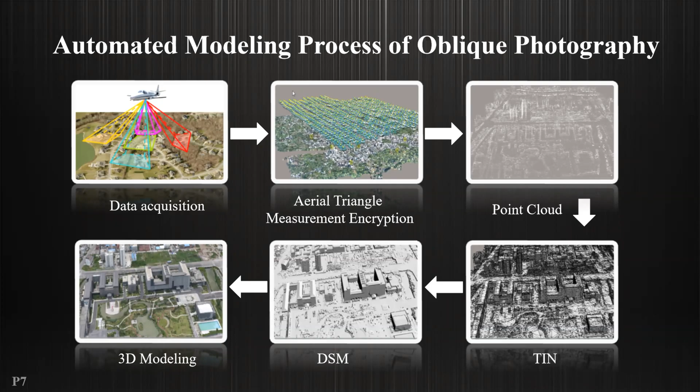This is one of the examples we did in a city in China, and we can see for this area the model is very detailed and looks very real.

There are some advantages of oblique photography modeling—we can call them efficiency and low production cost. So the advantage of oblique photography is very obvious, and based on the oblique photography model, we can do further functions or operations based on the modeling we get.

We can overlay the oblique photography with vector polygons to extract buildings or objects from the continuous oblique photography model. Based on this, we can achieve functions such as drawing a polygon on a website, giving it attributes, and submitting it. After that, every time we click on that building, we can get the attributes, which are stored inside the vector data.

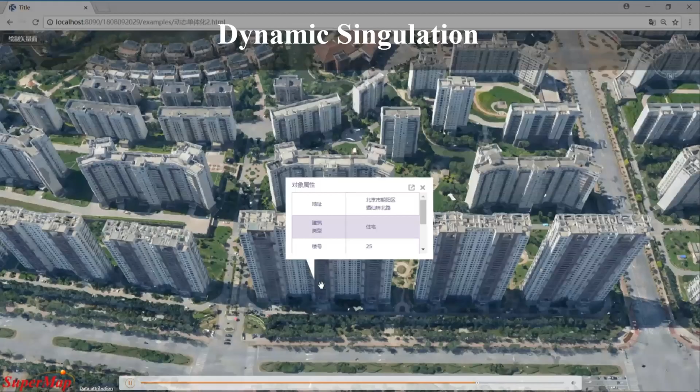Based on this, we can create thematic maps to render buildings in different colors for the whole city, and we can achieve more functions, such as management of 3D real estate for urban complex buildings.

For example, realizing sophisticated management of complex building complexes, and realizing comprehensive expression of multi-property rights buildings in the same space, or applying 3D results to confirming rights of registration in the registration and acceptance stage. The last one is the integrated 2D and 3D data being shared by departments to further explore value.

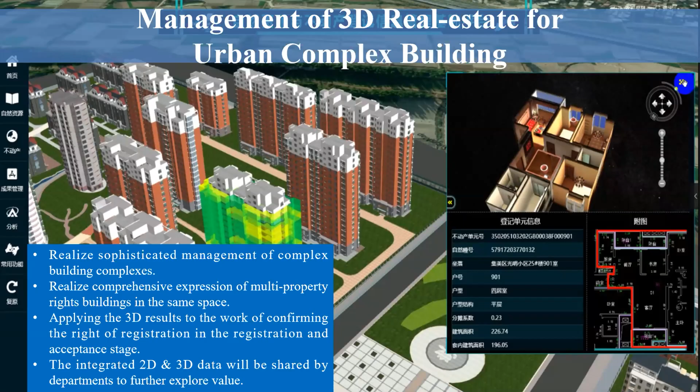So that's oblique photography. The second topic of my presentation is about BIM. So what is BIM modeling? It's defined by the American National BIM Standards Association as a digital expression of a construction project—a shared resource providing a reliable basis for all decisions during the entire life cycle of the facility, from construction to removal. At different stages of a project, different roles insert, extract, update, and modify information in BIM to support and reflect their respective responsibilities in the collaborative work.

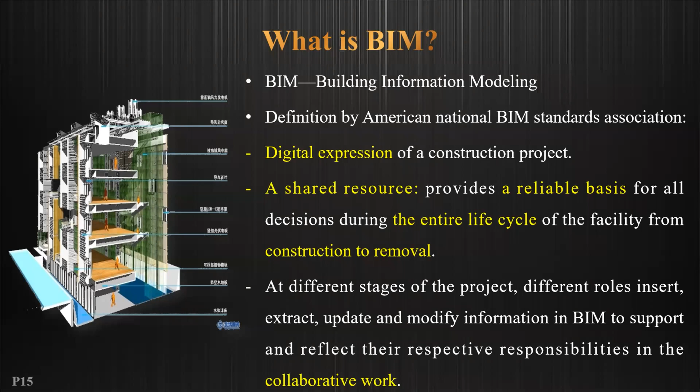So BIM will be very helpful and necessary in digital twin. This shows the global development of BIM. The first is in the US—the US GSA department is an advocate of BIM technology, and until now more and more countries' governments have raised the standard of BIM in their countries at different times.

So BIM plus GIS is very necessary in the next stage of using BIM. The BIM software or BIM model itself can be used in the design, planning, and construction stages of a building or construction, but in the operation and maintenance and management stage, GIS can help a lot. So BIM plus GIS can bring the building from macro to micro, and from outside to inside. Okay, so that's about BIM.

Based on these two types of data, oblique photography and BIM, what kind of function or application can we achieve in digital twin? Here I divide them into four stages for a building. The first one is input and visualization, the second is the urban planning stage, and then analysis and simulation.

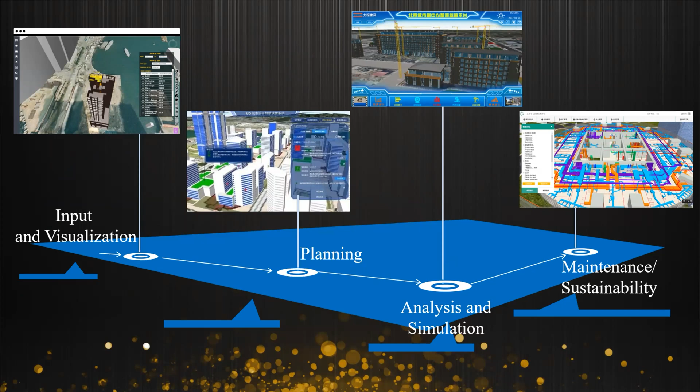The last one is maintenance and sustainability, input and visualization.

In oblique photography, SuperMap cannot generate the oblique photography module itself, but there are a lot of commonly used software we can use to get data from, such as Street Factory, ContextCapture, Pix4D, or PhotoScan. All of them are popular software for generating oblique photography.

In SuperMap, what we can do is put the oblique photography module into a GIS environment, and they can be shown together with other types of GIS data, including terrain data, satellite image data, underground body data, and other types of modules.

There is another example, for a whole city, which is a 3.2 terabyte oblique photography module for the whole city. We can see it shows the factory in a very detailed way.

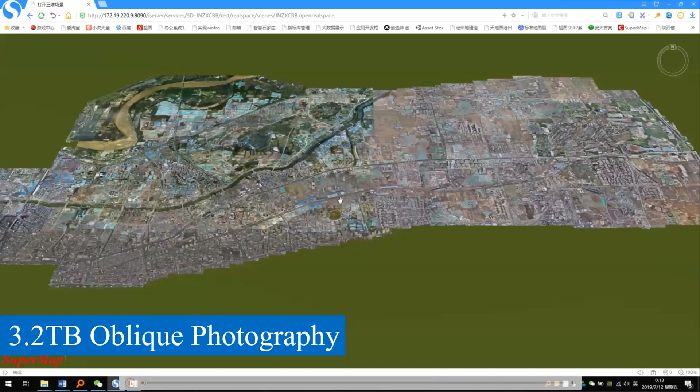For the whole data, it doesn't need to take a long time to capture all of them. Only a short time, maybe within one month, we can get all of the information like this very easily. We just need to get the permission to fly a UAV around this city.

So in the industrial chain of oblique photography, SuperMap, which represents the GIS platform, is in the middle. Earlier, we need to use UAV or an oblique camera to fly and do automated modeling. Then we can import all of that into the GIS platform, and after that, we can construct or establish different industry applications.

Talking about BIM, it's actually similar to oblique photography. SuperMap cannot generate the BIM model, but we can use it with different BIM software like Revit, Bentley, CATIA, and for different formats like CityGML, IFC, FLT, or GLTF, we can support all of them.

So we can see models from Revit, Bentley, and CATIA on the left side, in their respective BIM software. And on the right side, it shows totally the same model in the GIS software, which is SuperMap iDesktop.

So talking about input and visualization, next I want to talk about planning and design. There are some problems in planning and design, such as collaborative design, ground and underground planning, multiple planning conflicts, and scientific planning. In this stage, there are applications like online design, parametric design, 3D design, model browsing, internal roaming, and scheme comparison.

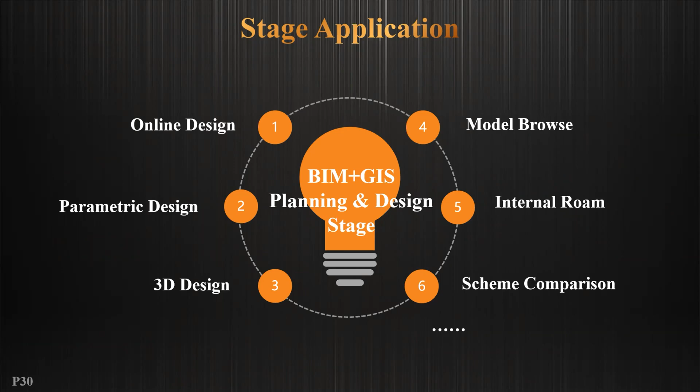So this is what we can do in a digital twin platform.

First, this is a real case we did in Hong Kong, and the whole city model is generated by oblique photography, but some of the important buildings, the key buildings, we use BIM models to render.

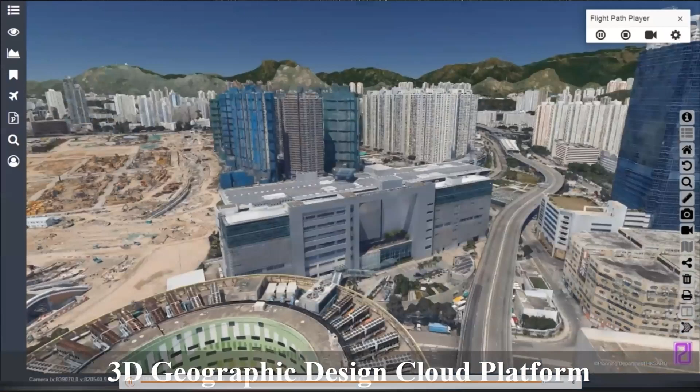And it can help us do urban planning functions, such as scheme comparison. We can put different models of the same building in the same view to compare the scheme.

We can also compare it with the street view, with the current street view, and set it with the photo to show the differences, like after we build a new building here, what will the differences be?

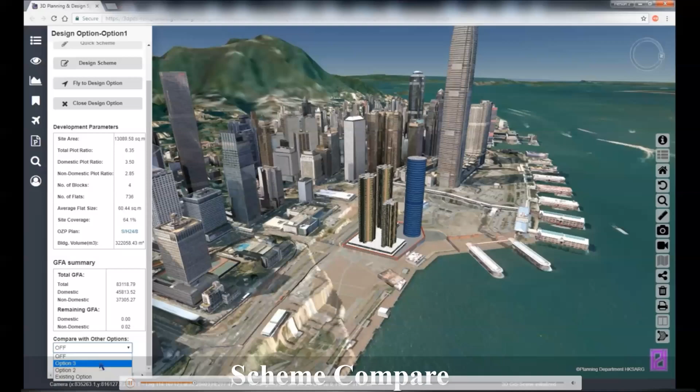The next function is about planning approval. Designers can submit their plan to the system, to the website, and then the user can see detailed information, the detailed parameters of this building, and then we can choose to pass it or not.

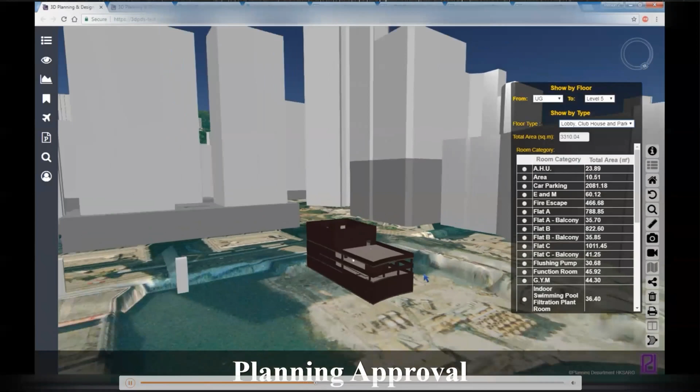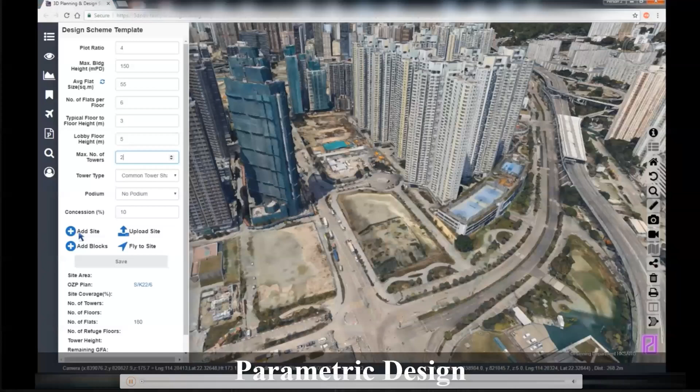The next one is parametric design. So if I just want to roughly add a building here, with a different floor count, with a static shape, how will it look?

So we can use parametric design to easily add new buildings and change the height and the position of them.

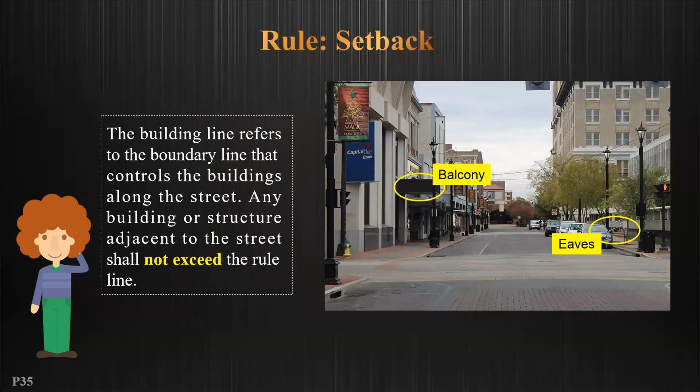In urban planning there are some rules, such as setback. Setback means the building line refers to the boundary line that controls buildings along the street, set back from the street. In the digital twin, we can easily get the model of buildings and, based on analysis, see which building is illegal.

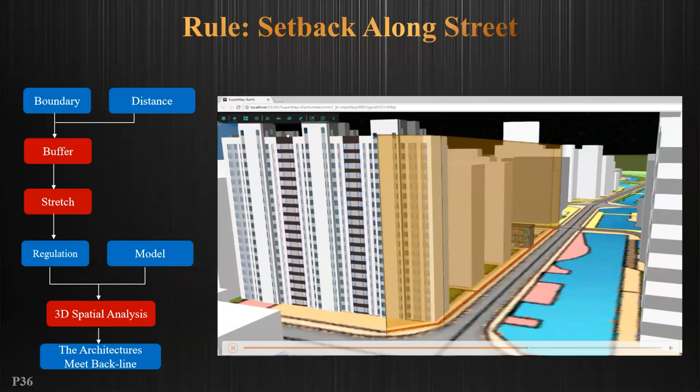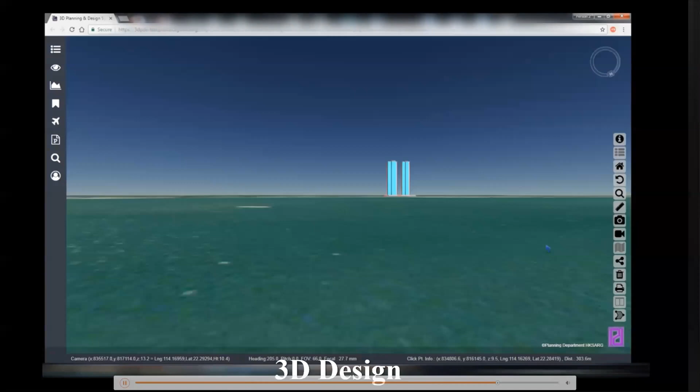In the 3D design function, there are a lot of 3D analysis, such as openness analysis, which shows whether the sky view will be affected by a new building or not, and also shadow analysis, where we can simulate shadows in the city, and flood analysis, which shows which parts will be flooded. Based on the terrain, we can do slope and aspect analysis. So there are a lot of 3D design functions that can be achieved in digital twin applications, like this one analyzing the skyline.

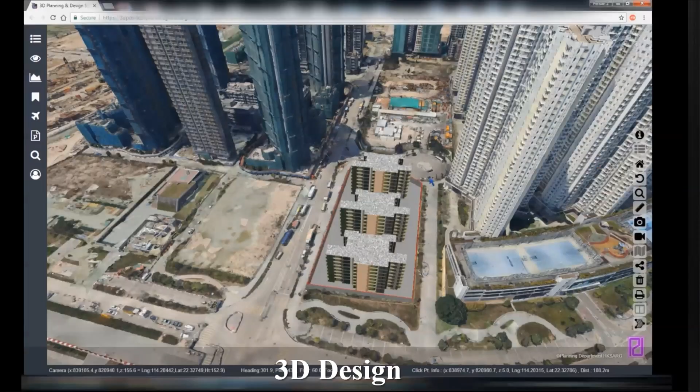There are some more cases, such as planning modeling, decision support, decision monitoring, and others. Now we go to the next stage of application management, which is analysis and simulation.

There are some 3D analysis functions based on the model, such as cross clipping. We can draw a box to clip the building and see the inside of it. It also supports BIM spatial query and attribute query.

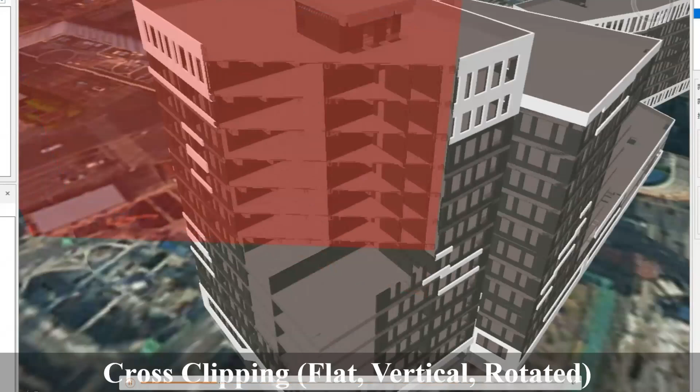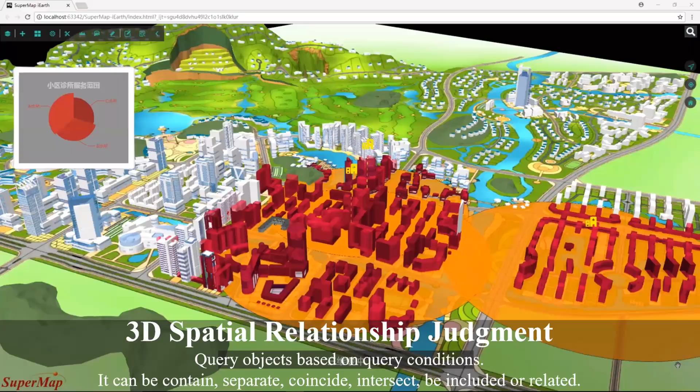There is also a function for 3D spatial relationship judgment. We can query objects based on query conditions, which can be contain, separate, coincide, intersect, be included, or related. Other spatial analyses like viewshed analysis, shadow analysis, extract skyline, section map, terrain contour map, and terrain slope aspect map are also allowed.

All of the results of analysis can be exported as a 3D solid model.

In the last one, maintenance and operation can solve some problems like incomplete supervision, weak early warning, emergency scheme issues, or poor management and facilities. So we can achieve functions like video supervision, emergency management, asset management, equipment management, safety management, and indoor navigation, such as for a skyscraper.

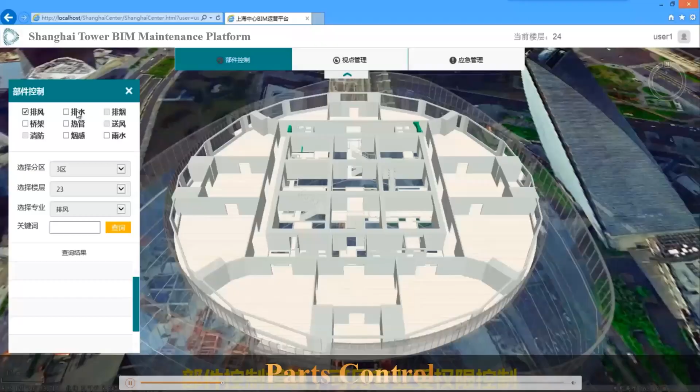This is the Shanghai Tower maintenance platform. The Shanghai Tower is the second highest building in the world, the highest one in Asia. We established all the detailed objects inside of it, and all the detailed information and parameters can easily be checked from this system.

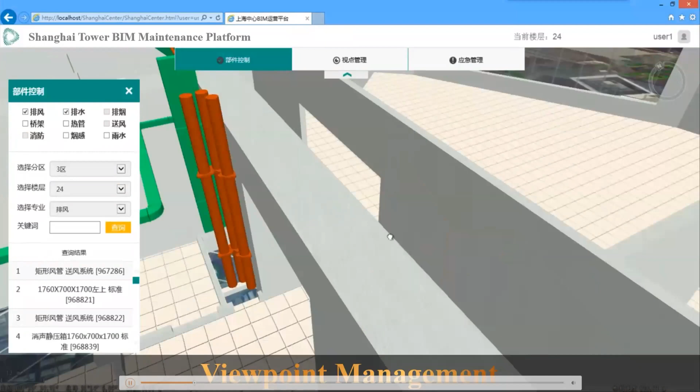We can achieve parts query and positioning to get the location of every object. There's also viewpoint management, so if we add some new viewpoints, in the future when we move around, we can easily go to the viewpoint we stored earlier.

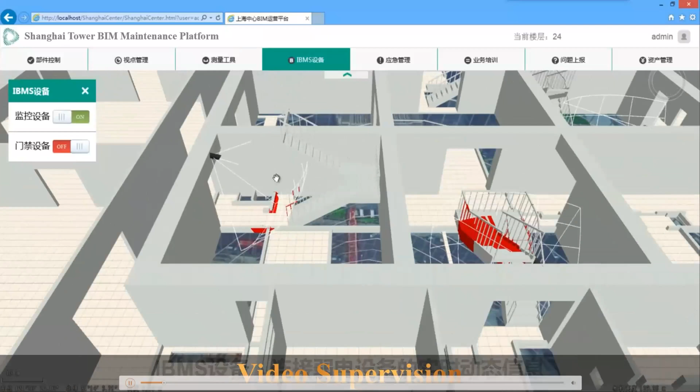There is also video supervision, which can connect with IoT, such as a CCTV camera.

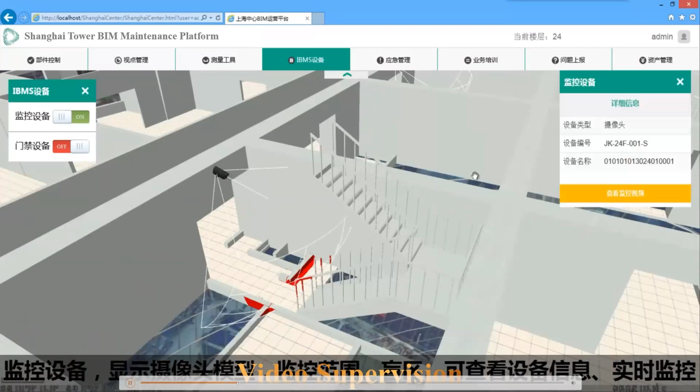Hello? Yeah, sorry, it seems my network has some problem. Let's continue.

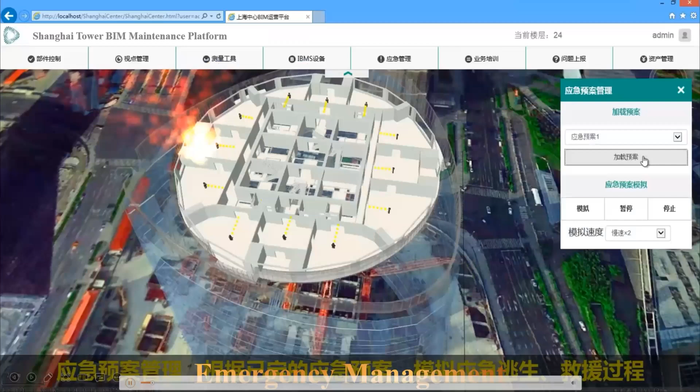About the features here, next is emergency management, where we simulate the emergency situation and have an emergency plan to manage emergencies. And the asset management aspect, where we can see all the detailed information of each asset.

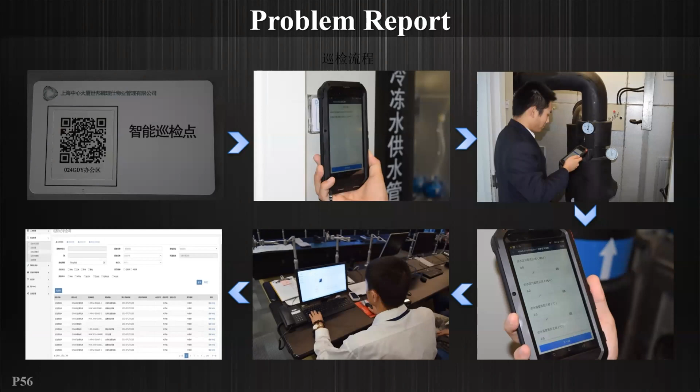For problem reporting, we can connect with mobile devices, and based on the mobile we can report problems when we do the operation and maintenance function.

This is a smart city management function, and it provides functions like video surveillance, labor supervision, environment monitoring, progress supervision, video conference equipment monitoring, and others. The data size is 252 gigabytes, and the number of 3D models reaches 3 million.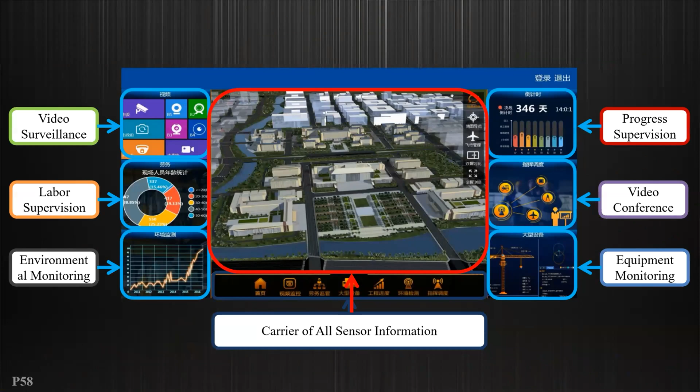There are some other functions or cases we did before, like equipment check, facility maintenance, park energy consumption analysis and optimization, and the last one is security facility integration.

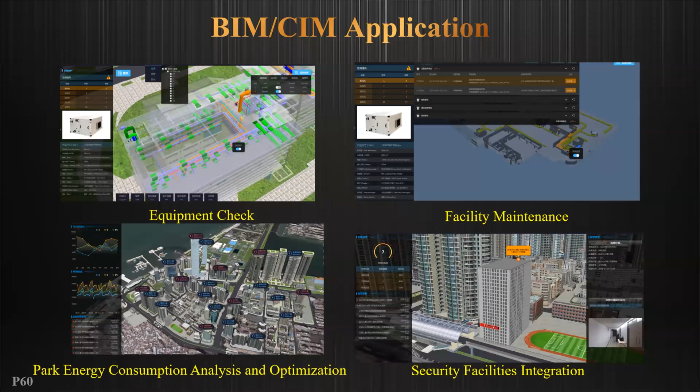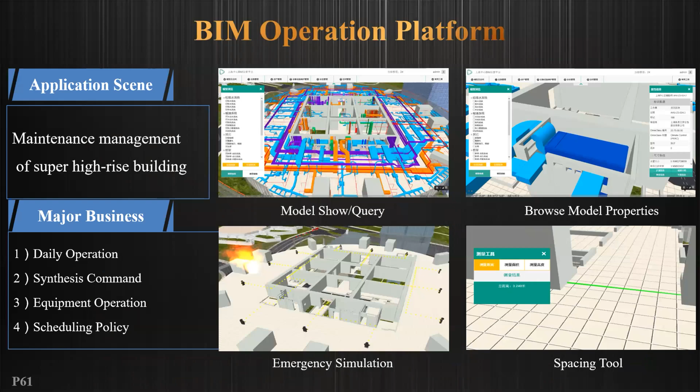All of them can be easily used in digital twin technology. In the BIM operation platform, we can achieve daily operation, synthesis command, equipment operation, and scheduling policy, and show the whole city view in a digital way on a big screen. Other applications include building overview, key area display, building management, weak power management, fire warning, and video management.

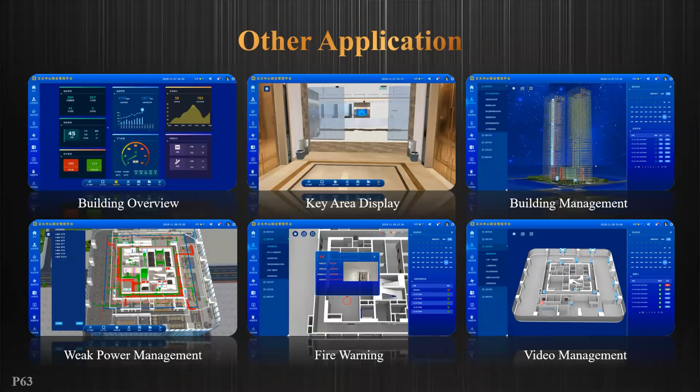Okay, thank you all, this is my presentation.

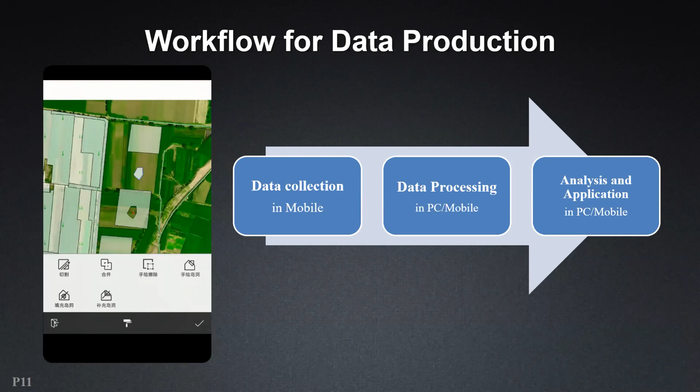There are also some advantages of field surveying with this app—it can save your memory and power, and also save mobile data. It is high efficiency, and it supports searchability and dynamic interaction.

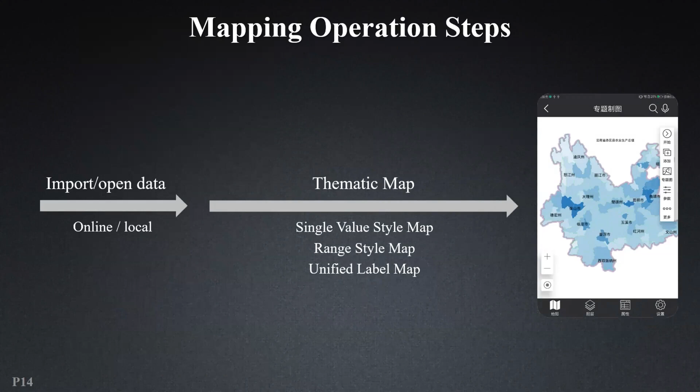So the next function is mapping. It is easy for you to do a mapping in the mobile terminal. You just need to import the data or connect the data first, and then do the thematic map, so that you can get a thematic map, just like the range style map or unified label map. Here lists some styles of the thematic map which can be achieved by the mobile terminal.

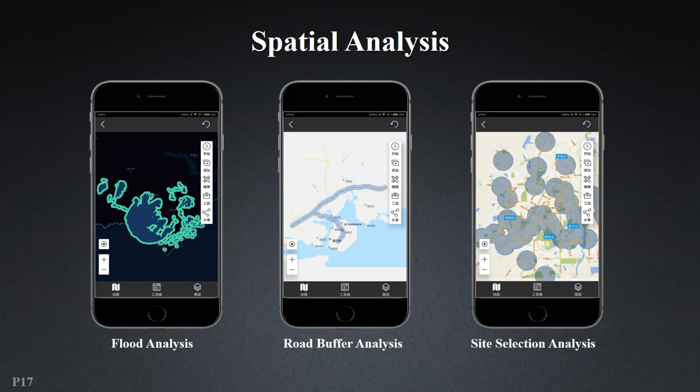And also the data analysis. The spatial analysis is the most important feature in the GIS field. So in the mobile terminal, the spatial analysis can also be achieved. You can easily and conveniently do the spatial analysis after connecting the data, such as buffer analysis and also site selection analysis with the mobile.

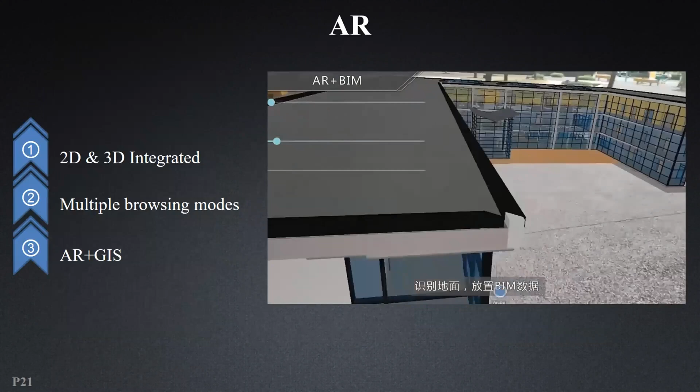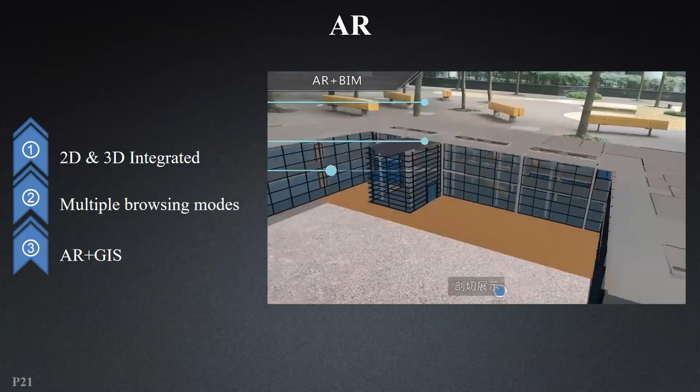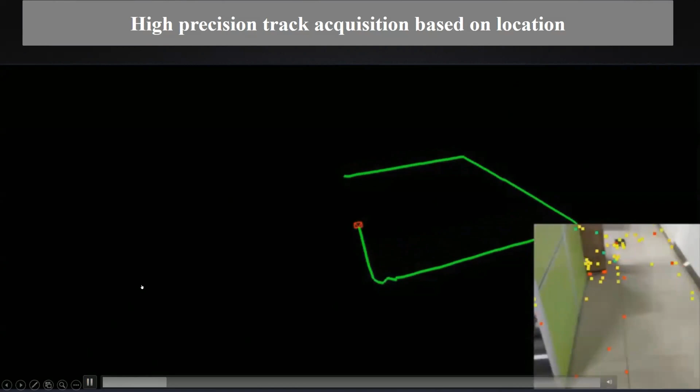And also the AR map is supported. So what is the AR map? It is integrated with AR technology, and with this capability you can view the 3D models with AR effect, just like walking in AR buildings. The AR technology also allows us to check and get a high precision based on the location indoors.

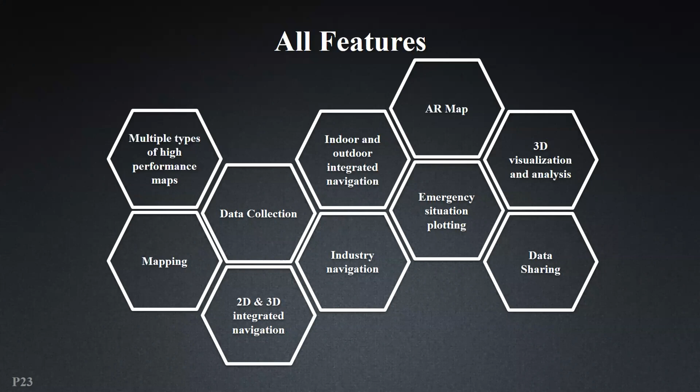So here are all the features of the template, just like the mapping and data collection, 2D and 3D integrated viewing, and navigation or indoor and outdoor integrated navigation. You can achieve all this with SuperMap iTablet, and it also has high performance map operations.

And the tablet can be used in many fields. Some cases use the template, just like the National Census Project, POI survey project, and land survey project. With SuperMap iTablet, you can get high efficiency in this field management.

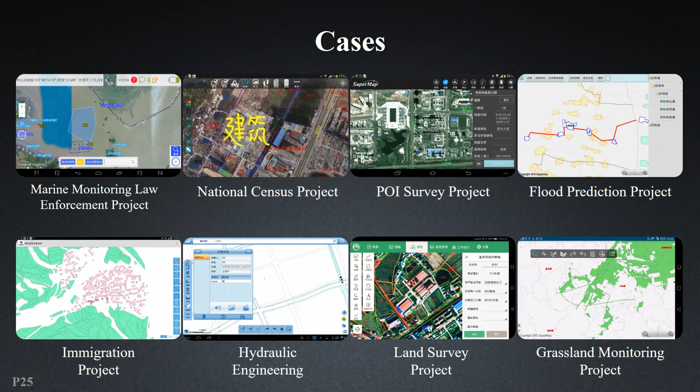And I mentioned that with SuperMap iTablet, you can share your data with your colleagues, or you can share the data from your mobile terminal to the desktop terminal, and the data can be displayed in multiple terminals.

And the second step of the discussion—here I want to talk about this. We will summarize this content.

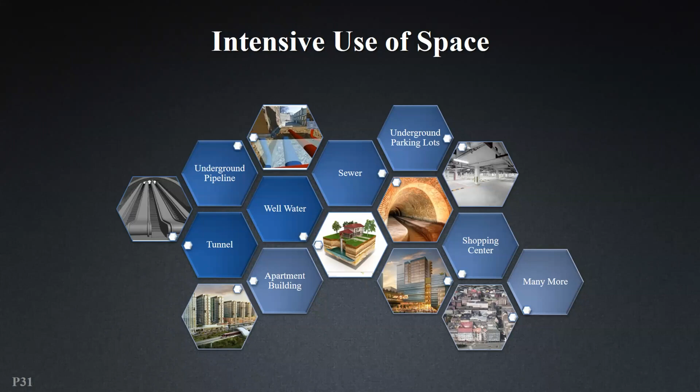So what technologies do we need to consider to achieve this 3D cadastre platform? Firstly, we need to update the 2D and 3D models for buildings. Traditionally we only have 2D data, so the first thing is to convert or update this 2D data to 3D models, and then we also need to connect the attributes with 2D and 3D data, so that in either 2D query or 3D query we can achieve information query of each resident or each building.

And also we need to build a unified standard for the cadastral data. The legality checking is also one of the points we need to consider, whether the buildings or the design meets the requirements. And also the platform can publish public information.

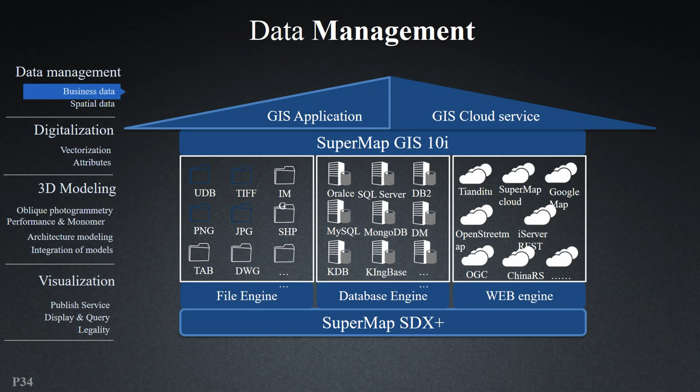SuperMap has strong capabilities of managing data. No matter the file data, or the data in the database, or the web engine data, we can all manage it with SuperMap SDX+, so we can integrate the business data together. As shown here, with SuperMap Desktop SDX, we can integrate the history data or the daily updated data together to construct a unified cadastral database.

For the spatial data, there is vector data, image data, and models. These different data can all be managed by SuperMap SDX, either in files or in databases. So you don't need to worry about how to manage the different kinds of data.

The second one is about digitization. As I mentioned, the first way is to collect the data on site, the second way is to digitize the image data, and also we can get the vector data by converting the CAD data.

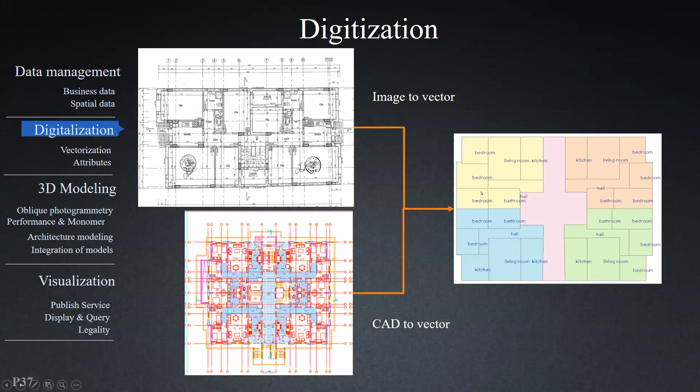Here we have the cadastral vectorization plugin in SuperMap Desktop. This plugin makes the digitalization easier, and you can get the result much more easily and conveniently.

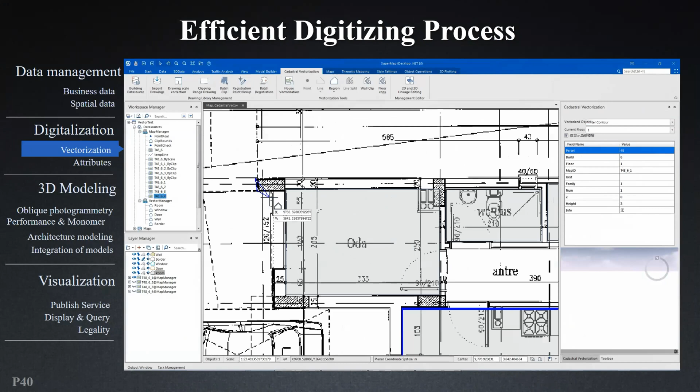You can click here and take a look at the video. You can import the image data to the desktop, and then draw the rooms. After drawing all the rooms, we can draw the outer contour, and this way get the wall of the building.

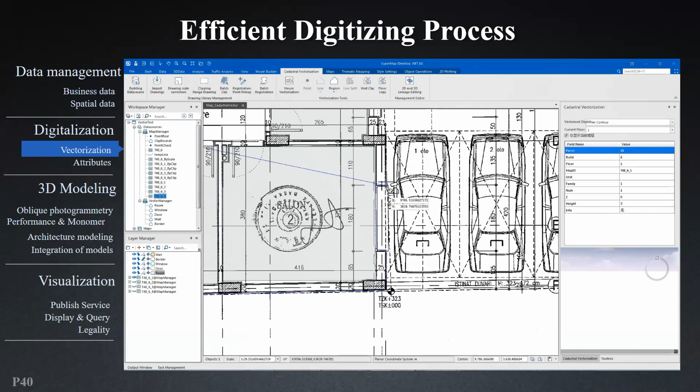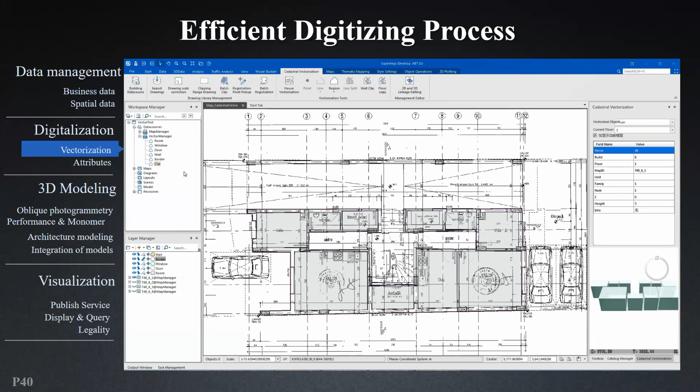We have many tools to help you do this operation. After that, we can use the wall clip to get the wall of the house. We can also draw the windows and the doors, and after the operation, we can get the walls of the building easily.

Then we can copy the walls to different floors, and then view the results with 2D and 3D integrated display.

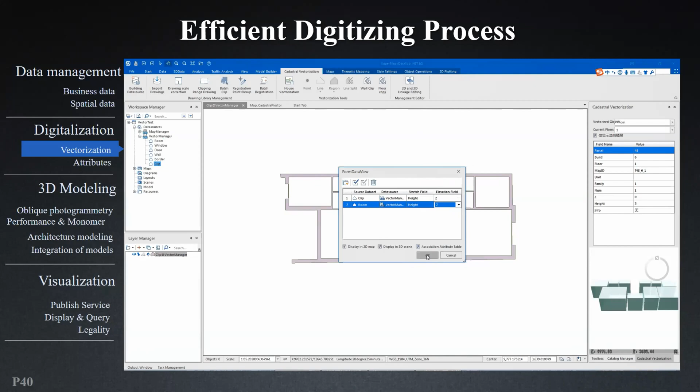After the operation, we can get the cadastral result, and we can view it in the 2D map and the 3D scenes.

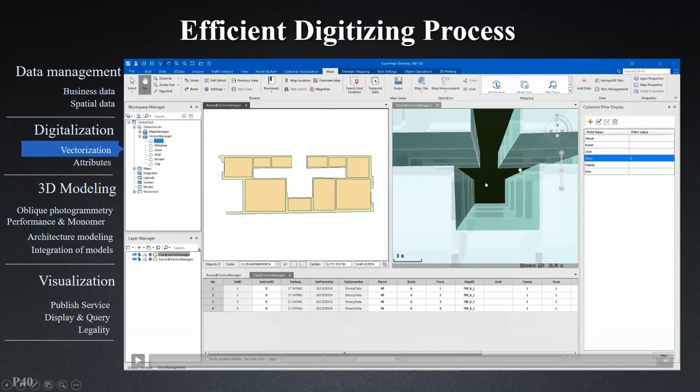For the CAD data, we can just import the CAD data into SuperMap Desktop, and then convert the CAD data to vector data. What we need to do next is adjust the data to the correct position, and after that, we can get the cadastre result.

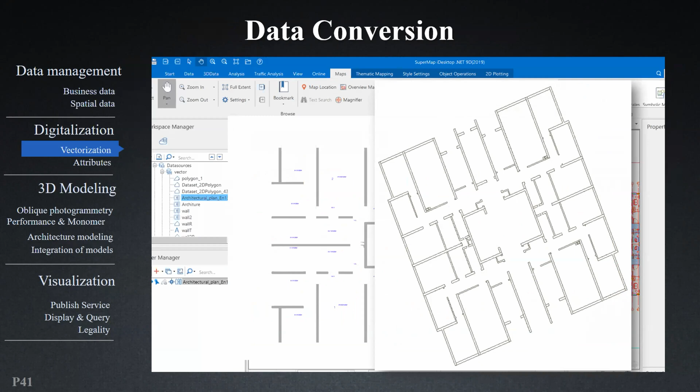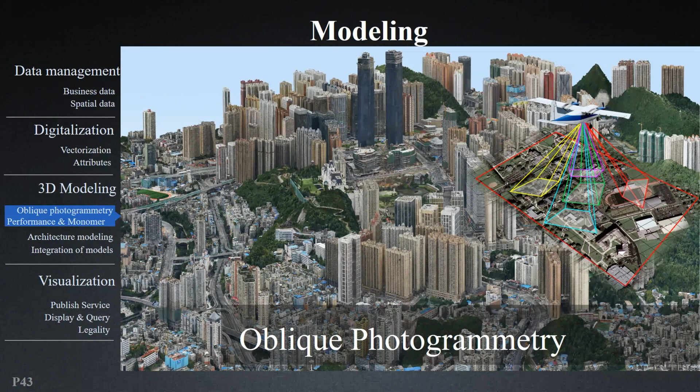So the next one is about 3D modeling. As the second digitalization method, we know that we can first get the 2D data by digitalization and then build the 3D models, and also use oblique photography to get this 3D model. There are many advantages of using oblique photography, and we can also have many methods to optimize its performance, such as texture compression, data type generation, and storing oblique photography through MongoDB.

All this can make you view these things in SuperMap efficiently. In addition, we also provide tools to process the oblique photography data, so you can make it much more perfect.

And then we can also get the building bottom surface with deep learning, so after that we can get the 3D models quickly. The second way is what I just mentioned, stretching from the 2D data to the 3D, and then we can get the 3D models quickly.

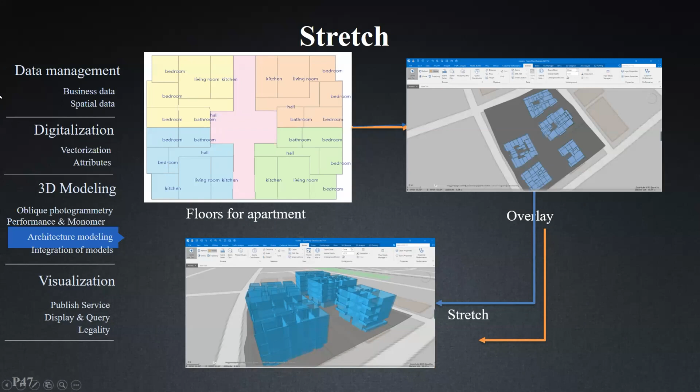And you see, we can display the cadastral data and view them associated, so we can check each floor and also each room.

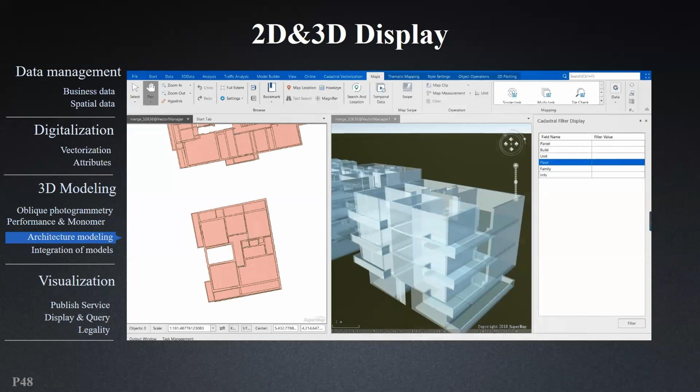Then we can also integrate the models and the oblique photography, so we can check the information on the oblique photography.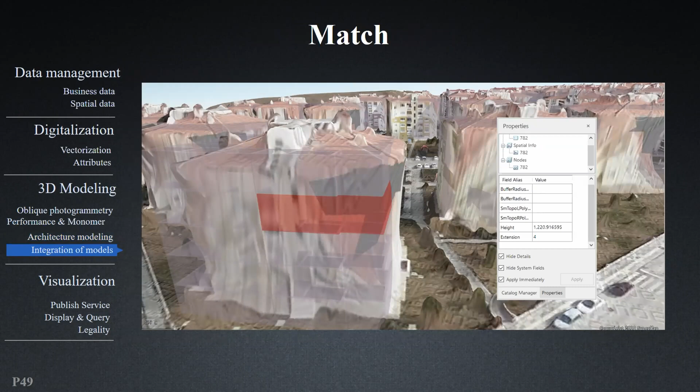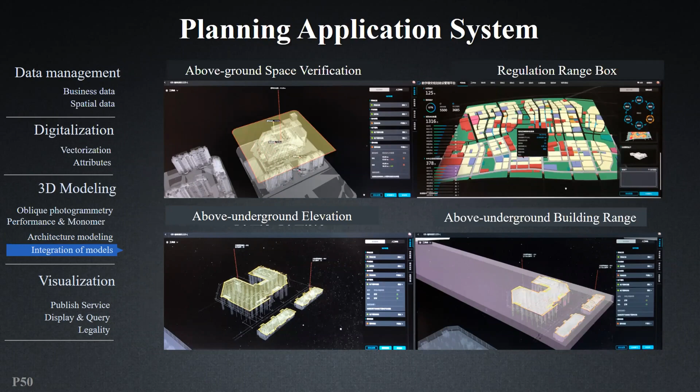These 3D models can also integrate with terrain data, merge with oblique photography data, and integrate with water effects and video maps with the oblique photography. All this data can be integrated into one platform.

So here we have a question: why do we import models into a GIS platform? The answer is because without it, the models lack geographic information, cannot integrate with terrain, have no performance with massive data management, and cannot do spatial analysis.

So after you import the models into SuperMap desktop and manage the different models there, you can solve these problems. Besides, in SuperMap we can also make yours much more beautiful by adding 3D symbols.

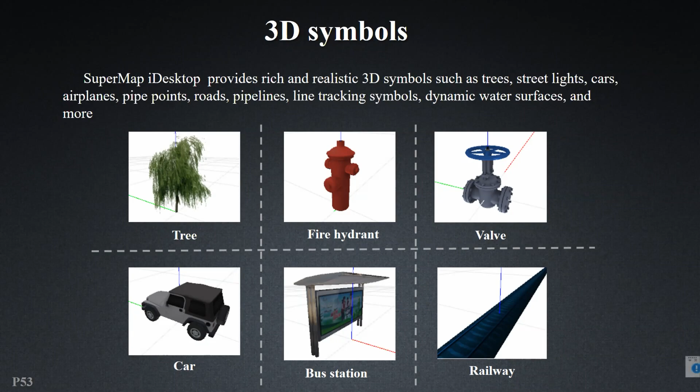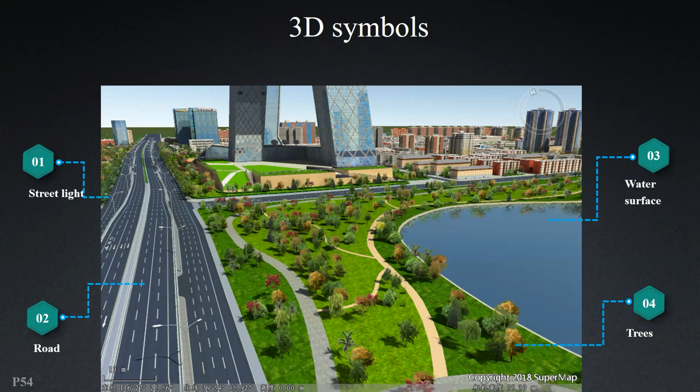You can add the street light, road, water surface, or trees. All these 3D symbols can be added in SuperMap desktop, and the dynamic water surface symbol makes the scene vivid.

So how do we solve the unified management of multiple source data? As we know, we can integrate oblique photography data and modeling data or BIM data, and all these different formats of data can be managed in SuperMap with a unified format. It is S3M. With S3M, all the data can be managed with a unified format, and it also makes the management easier.

The advantages of S3M are that it supports multiple sources of data, like BIM data, oblique photography data, and modeling data, which can all be generated in S3M format so you can manage them in a unified way.

S3M can keep the data secure, and it is a small file for web transfer, making it easier to manage. It can also render these 3D scenes, and after that, we can publish these 3D scenes through SuperMap server.

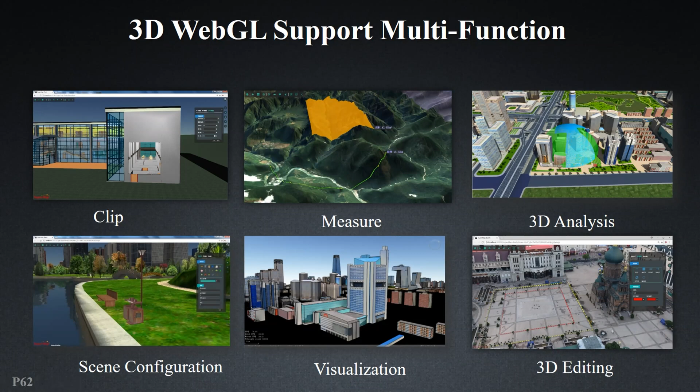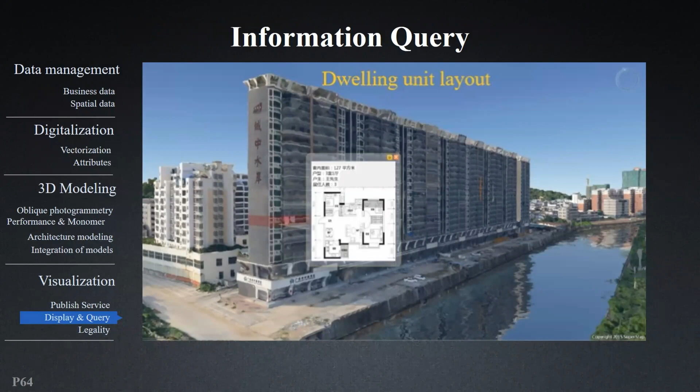So here, just like we can also view these things on the mobile terminal. And also we can build a platform to manage this 3D cadastre, so that we can achieve information query, query the information of each floor, and check the apartment diagram and household information.

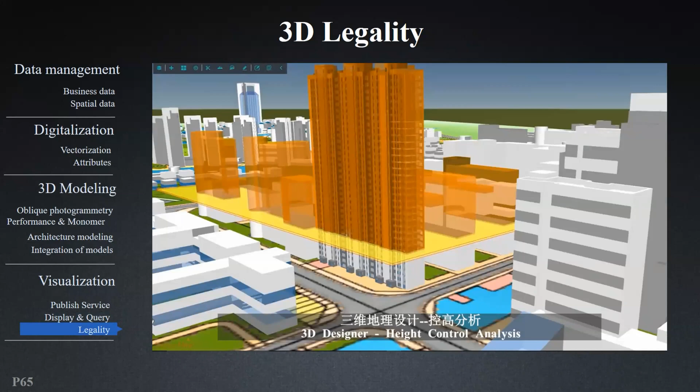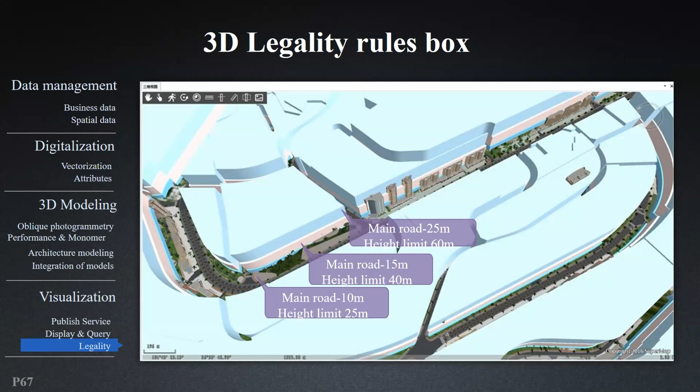Besides, we can do more for 3D in the design stage, such as height control analysis and legal distance detection, so we can know whether the designs meet the planning requirements. With this legality rules box, we can easily know which buildings meet the requirements, or which do not.

So here, let's take a look at some cases. The first one is this 3D cadastre management system in Finland. This system uses oblique photography to manage the 3D cadastre in Finland. We can search the information, the apartment information, and...

This system manages the household information and also the 3D cadastre. This platform not only has the oblique photography, but also integrates with the 3D models, and here you can see the underground pipelines. So it is an overall management system.

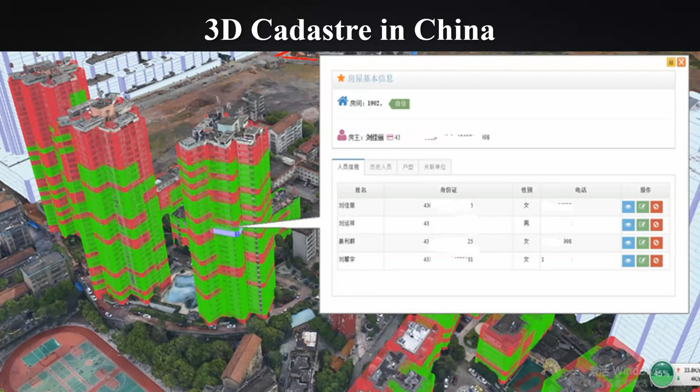And also we can construct a smart community to manage the communities, to manage the buildings in the community. And here we can check the household information. We can know the owner of the house and the families of the household. And also check the address of the buildings, and who is living in this house.

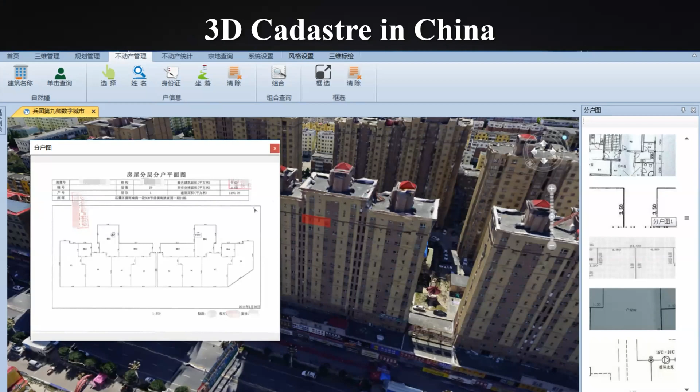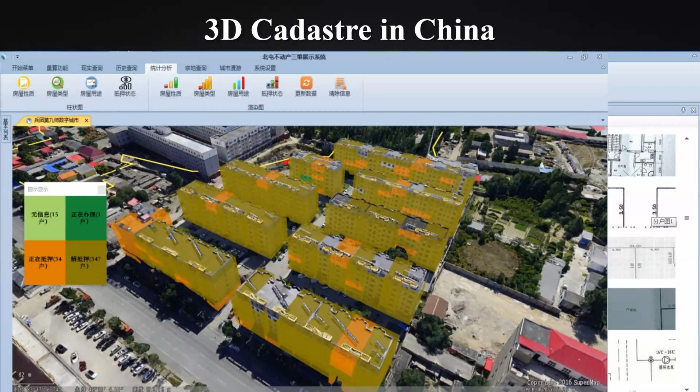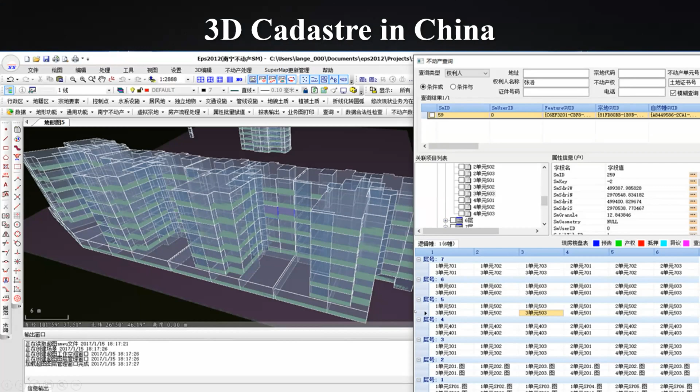It can be managed to manage the apartment diagrams, and also do statistical analysis, such as household statistics and types of households. And also it can be checked associated with the 3D models and the attributes table. So here we can either need to know the information of the household, both on the 3D models and also on the forms. So let me make a summary.

So with this 3D cadastre, we firstly need to solve the data management issue, and then we need to digitalize the data. After that, we need to do the 3D modeling, and then we need to build a system to display the 3D models, as well as manage the household information, the buildings information, and some necessary analysis tools in the platform.

With SuperMap products, we can integrate different types of data and make the data processing and 3D modeling efficient and effective. And the plan with SuperMap iClient for WebGL can make the platform flexible, so you can expand your requirements or expand the functions of the platform. So I think that's all from my presentation. Thank you for listening.